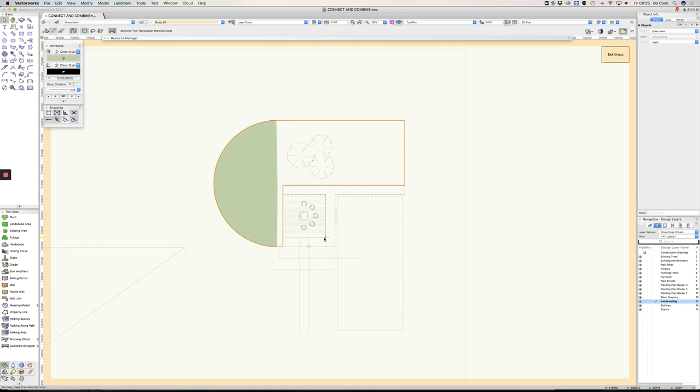I'm just going to show you that in this group here. If I select all, I want you to have a quick look—I've got quite a few lines. This one here, they're obviously not joined together because I've got no fill. I've got a part fill on this arc. This line here is too short and this line here is too long. So I'm going to show you how I'm now going to get these all to join together to become one object. At the moment you can see there are 6 objects—5 lines and 1 arc.

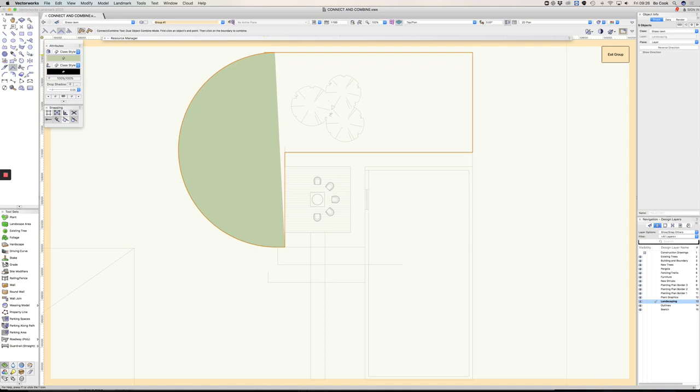So selecting the Connect and Combine tool and selecting the Dual Object Combine mode, I'm now going to nip around. I'm going to grab that little line there, join it to the arc. Grab the arc, join it to the line. Grab the line, join it. Grab the polyline, join it to that line. Now I've suddenly obliterated my other lines—you can see they're sitting underneath. So I'm just going to send that to the back. Connect and combine tool again.

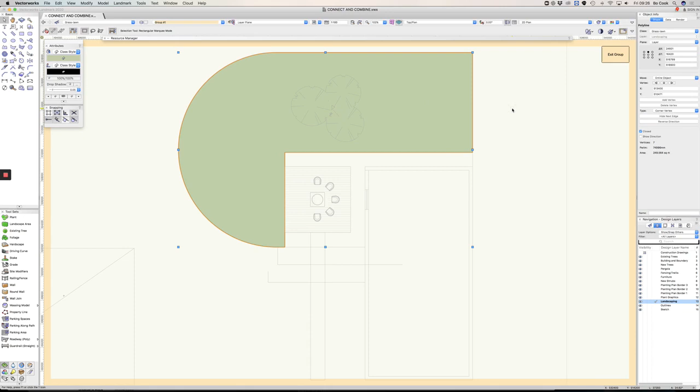Join that one to there, and then I can join - oh, we're back on top again. Let me just send that to the back. And connect to there, so now we have one polyline. Okay, so we've joined all those together. Again, there are other ways of doing this, but in some instances this is the best tool to use.

Now the one mode in here that people really don't fully understand, and I find really incredibly useful, is the multiple object combine mode. So I'm just going to show you. I've got a deck, and I've got my deck lines, so they're all just independent lines. In this instance I'm going to show you the connect and combine, and I'm also going to show you the multiple object combine mode as well.

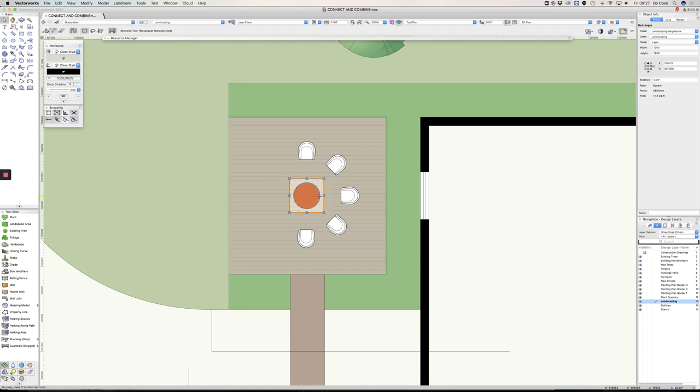So in this instance, I have a deck, then I've got a stone insert, and I've got my fire pit on top. Let's say, for example, we decide to take that out. Just going to shut off the furniture for a minute. So we're going to take that out.

I am going to just draw another rectangle and add a surface. Again, there are other ways of doing this, but I'll show you that one later - that's another of my tutorials. But now you can see here, we've got this sort of gap where that stone section used to be.

So I now quickly want to join those together, so I'm going to use the combine mode. I'm just going to whiz across and combine those two together. Right, that was easy enough.

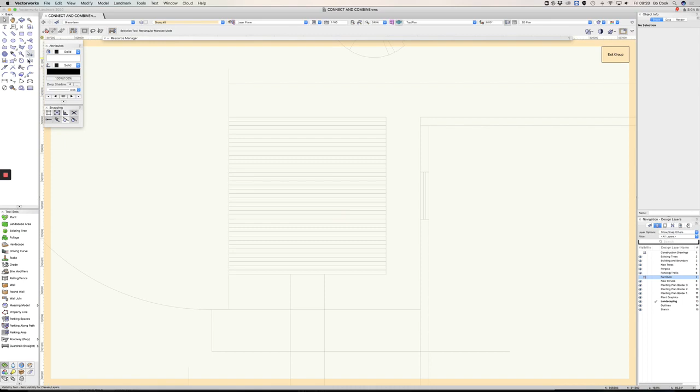Now in this scenario, just so that I can show you the multiple object combine mode, we are now also going to rotate these onto the 45 degree. So let's do that - that's now on the 45 degree.

Now you can see here I've got a gap. I've got a gap here. I've got obviously a gap here, and I've got a gap here. So there's a few tools that I can use now just to sort this out.

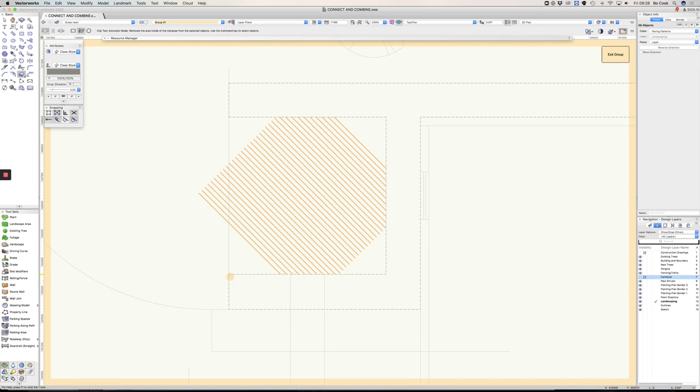Let's firstly just trim off those ends. So I'm going to use that tool I taught you first, which is the clip tool, and I'm just going to chop off those excess bits there. Actually, I could have used the second mode, it would have been quicker - the inclusion mode, but anyway.

Now, the multiple object combine mode. So what we first need is an object to combine to. So I'm just going to pop that in temporarily. It doesn't matter that it's green because we're going to get rid of it.

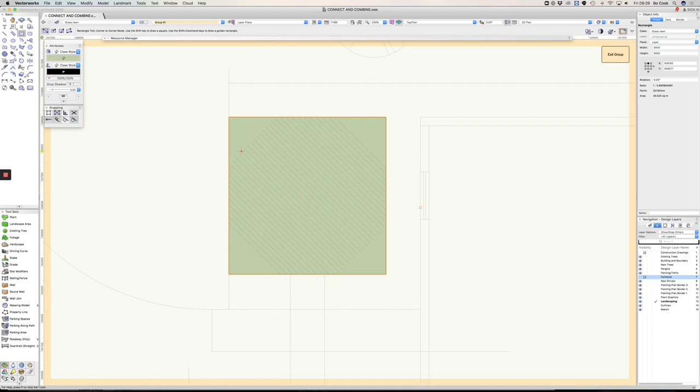But I'm working in a group here, because I've got lots of lines and I don't want them to all end up loose all over my drawing. So the first thing I'm going to do is select the object that I want them to connect to, which in this instance is this side of that rectangle.

And then I'm just going to whiz through, click on those lines, and they are all going to extend out to that line. Now note that it's not happening on the other side, because what we need to do is come round.

So we click now onto the other side of that rectangle, and then we can do exactly the same thing. And then that will extend out to that edge of that rectangle.

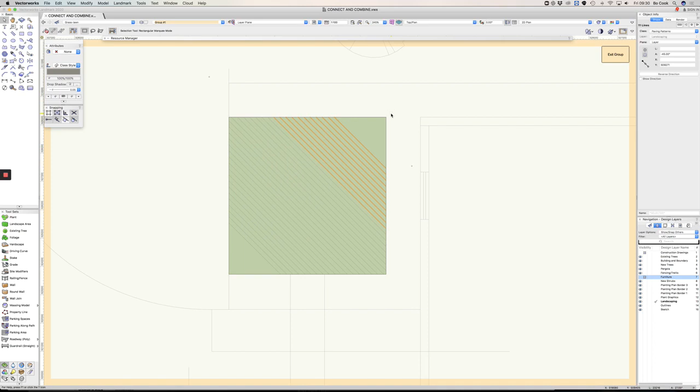Also, we would then need to just quickly mirror these over to fill up that gap, and then use the inclusion or exclusion mode on the clip tool to trim those off, then delete your template shape underneath, and exit the group. Obviously I'm not going to do that now because I'm just showing you the connect and combine tool quickly.

So that is an example of where I use that tool an awful lot, and that is because we are either extending the size of a deck or a paving area, or changing its shape, and therefore we've got these lines that need extending out. Rather than clicking on each individual line and dragging it, it's much easier to use the multiple connect mode of the connect and combine tool.